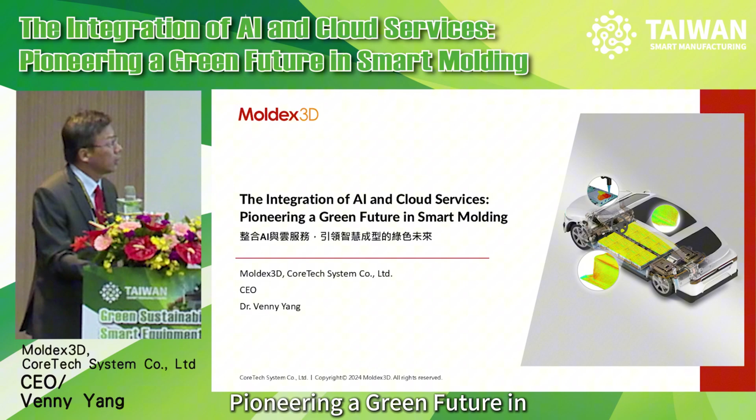My name is Venny Yang from Moldex3D. I'm very happy to have this opportunity to give you a presentation entitled The Integration of AI and Cloud Services, Pioneering a Green Future in Smart Molding.

Plastic has been playing crucial roles in all kinds of products, like everybody knows, such as home appliances that we are using every day, to automotives and high-tech products. However, plastic waste can cause very serious damage to the environment if it is not properly recycled and reused.

The concept of the new plastic economy revolves around creating a circular system where plastic reduction, reuse, recycling, and regulation work together to protect the environment. If we are able to reduce plastic use and reuse materials in the design stage effectively, we will be able to minimize the waste. Recycling then ensures these materials are reintroduced into the economy, reducing reliance on new plastic production. With proper regulation, we can ensure these processes are efficient and sustainable. Ultimately, this cycle not only can protect the environment, but also drives economic development, transforming plastic waste into valuable resources.

Today, I'd like to share how we can reduce waste and utilize recycled material effectively using simulation and some AI technology and cloud services.

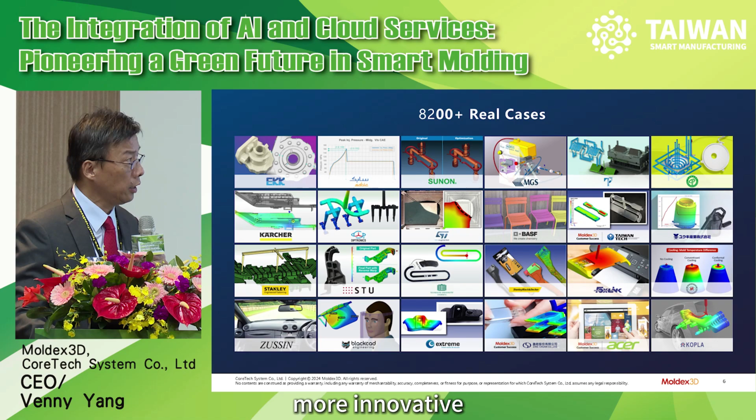A little bit of short introduction to our company, Moldex3D. We are the global leader in plastic simulation solutions, and we have been working with clients on more than 8,000 various projects to validate our simulation technology and also to help them address issues in the design stage, in optimization, and also to be more innovative in this global competitive market.

Let's take a look at the plastic development cycle. Everybody knows this very well, that we always start from part design, and then we go through a mold design stage. We optimize everything. If we can optimize the mold effectively during the design stage, then the mold tooling becomes straightforward. And once the mold is built, then you have to go through the mold tryout stage to make sure the mold can have a stable and efficient production.

Very often we found that we are wasting a lot of materials, a lot of time. We leave a lot of carbon footprint in this stage.

Starting from part design, the common challenges are over-design and over-engineering. We overly design the part, which results in excessive material use, high energy consumption, and increased carbon emissions, and so on. Also, this kind of inefficient geometry often leads to bad properties, bad quality, and then requires subsequent processing, recycling, and causes more waste during this process.

So if we can minimize the waste in the early design stage, we will be able to reduce the waste from the very beginning. We have solutions for design data management and also using some AI to assist in this process. And we have the DOE and also RSM technology to help users be more productive in the design stage. For example, if you have a new design, you can put the design into our database, and then you can find similar models from our database.

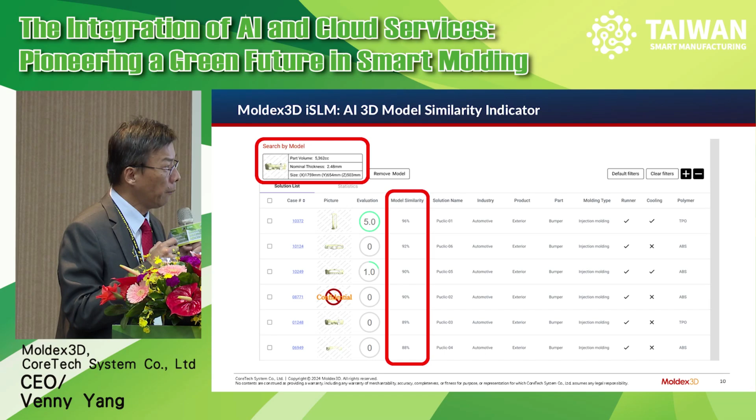So with this database, you will be able to reduce the waste from the early stage of the design process. And also, when you come to the engineering design stage, you have the DOE, you have the RSM, to let you understand the critical factors that might affect your ultimate part quality. With this, you will be able to minimize the warpage, reduce the cycle time, and balance everything very easily. So you can set up different control factors, different quality expectations in the system, and the software will run by itself, learn by itself, and give you the optimized solution.

So if you can somehow minimize the warpage, and then you are sure that this part can be molded effectively, then the next goal is probably to search for the minimum cycle time so that you can further reduce the carbon emission during the production process.

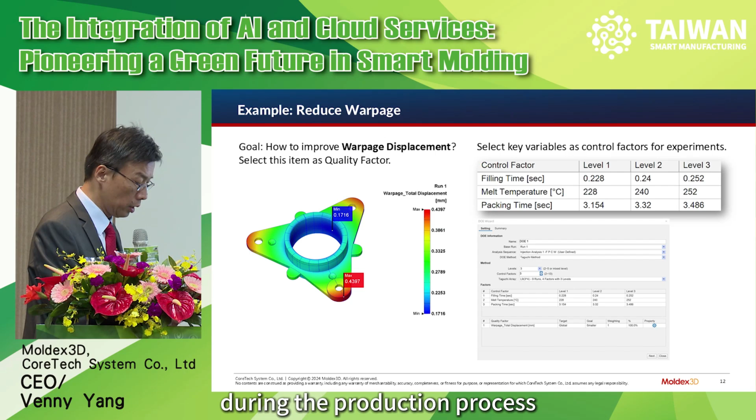So this is another slide showing the possibility to use our system to help you avoid a bad design from the early stage, so as to reduce the waste in the design to production process.

And the next challenge for reducing waste is to use recyclable material. We know recycling is a very hot topic for the plastic industry. Although many have been implementing the concept of design for recycling, and some already succeeded, it's still a very challenging topic for the industry.

Most importantly, it's because the material property is not as stable as the virgin material. So using recycled materials will increase the scrap rates and require more energy-intensive processes, which will lead to greater waste and inefficiency. At CoreTech, in our Moldex3D headquarters, we have the full capability to help you tackle the issue of unstable material properties that result from the recycling process.

We have a material characterization and research center to do all the necessary material characterization for our customers. We can put this data on our cloud service, called Material Hub Cloud. You can subscribe and give it a try, because it features more than 9,000 grades of commercially available thermoplastic materials. So when you have the virgin material, basically you know what to do.

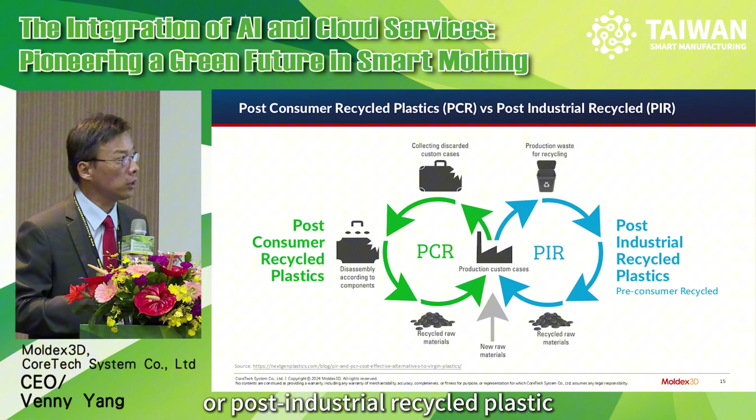Because you have the basic properties of everything, and you have experience working with it, you can start using Moldex3D to optimize your part design and mold design. However, if the material comes from recycling, it can either be post-consumer recycled plastic or post-industrial recycled plastic. Both materials will cause some instability and also some variation in the material properties. So how to find a suitable recycled material that has similar properties to the virgin plastic is a challenge.

So it's very easy now. You can go to our website and look up the materials in our material database, because there are 9,000 grades of materials available on the cloud.

And the next is how to reduce uncertainties when working with the recycled material. The answer is also quite straightforward. If it's a critical part, critical design, we encourage you to do some basic material characterization to really understand the properties of your recycled material. I think many people would think, oh well, that's an additional cost. I don't want to waste my money or spend my money on testing.

But then you end up wasting a lot of money during mold trial because you are dealing with the uncertainty that you don't know anything about it. So how to validate the right design and to ensure part quality, and also reduce the cost of rework and scrap during manufacturing, can easily be done by looking into our material database.

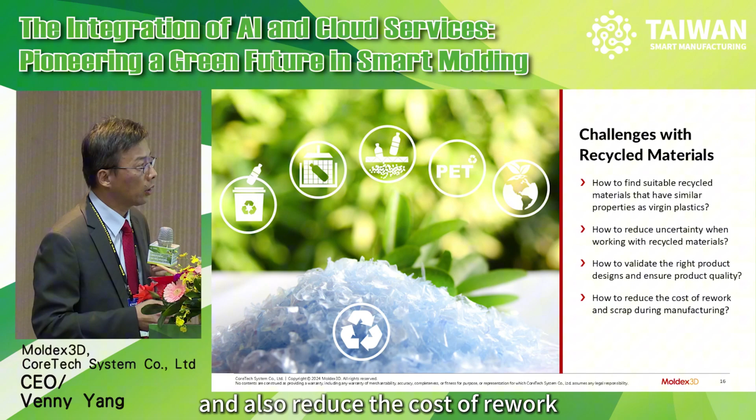So with this in mind, you know pretty much how to adjust your design to tackle these kinds of challenges. However, when we want to do the mold right from the beginning, you need to have a very good understanding of the quantity of the variation, instead of just the trend, just the qualitative only.

Okay, so we have a fully equipped laboratory in our headquarters. We have all kinds of instruments to help you characterize the material processing properties, because I think this is the most important one for recycling material. You can test the rheological property, you can test the PVT property, you can even test the mechanical properties.

And then you can use some kind of mixing rule to understand and estimate, okay, if you use 5% or 10% or 20% of the recycled material, how would that impact your processing condition? How would that affect your part and the mold design? You can do that kind of evaluation upfront to minimize the risk of using it in a very bad way, so that it would reduce a lot of waste in the process.

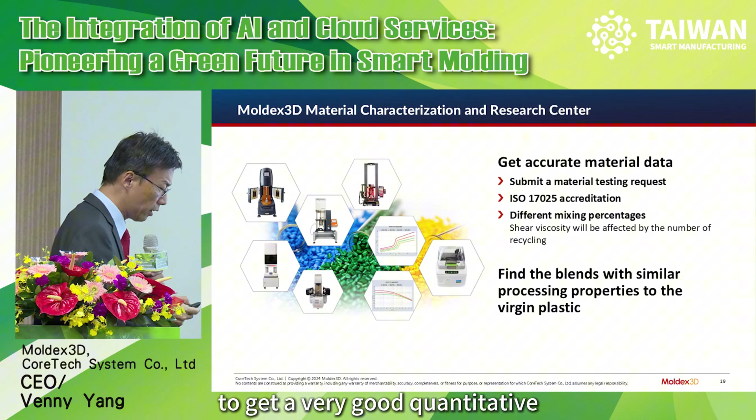So you can get accurate data from our laboratory, and this is an ISO certified laboratory. You can use some kind of mixing rule to get a very good quantitative understanding of the recycled material that you are using in your system.

But of course, for recycled materials, because the source of recycling and also the methodology used in the recycling can be different, it's always recommended to do some basic testing of this recycled material so that you can get a very quantitative understanding of the variation.

Okay, and the next topic is about how to reduce the material amount used in the design. Well, there are a lot of possibilities that you can try. For example, lightweight is a theme of the automotive industry, because every kilo of weight you save in the car's plastic parts can be turned into more efficient fuel efficiency for your vehicle. So you will definitely need to look into the lightweight topic.

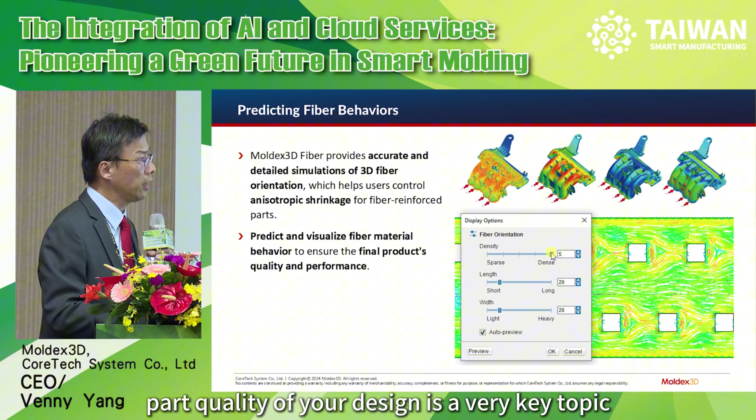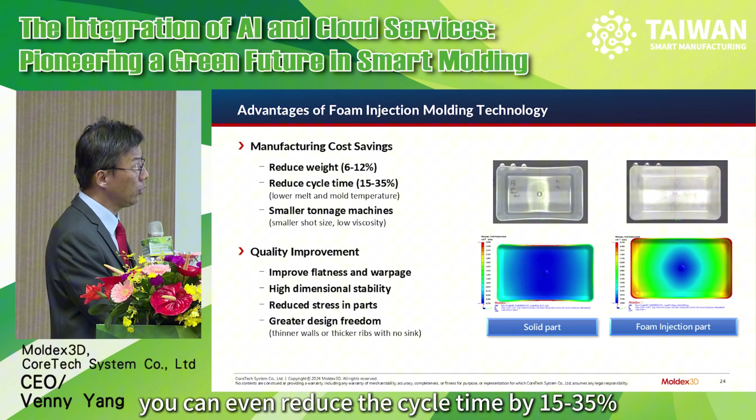And also, foaming is another technology that people usually use to reduce the part weight, and you can use Moldex3D to not only reduce the weight, but help you reduce the cycle time. In many cases, you can even reduce the cycle time by 15 to 35%. And for some special parts, you might want to use gas injection, water injection - this kind of process to hollow out unnecessary material so as to reduce the material used in your part design.

So you can reduce the waste from the very beginning of this entire process. You can also use Moldex3D for that. And of course, if you have a more advanced application, such as composite or compression molding, you can also find corresponding answers from Moldex3D.

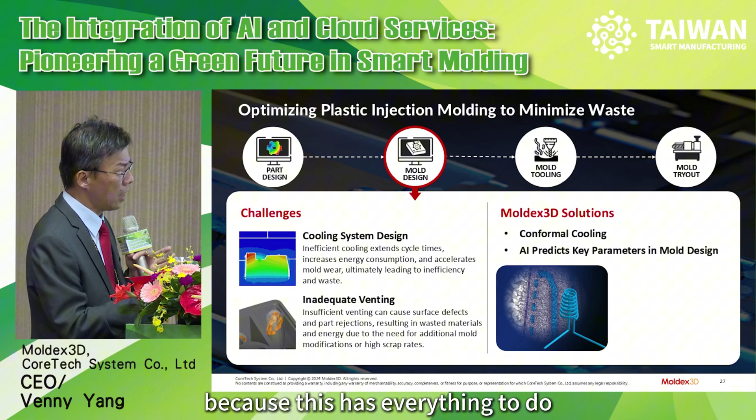Next topic is about how to reduce cost, waste, and carbon emission in the molding process. The most important thing is how to address the cooling, because cooling usually takes up the highest percentage in the entire molding cycle, and also how to address the issue of inadequate venting, because it has everything to do with the quality and appearance of your final product.

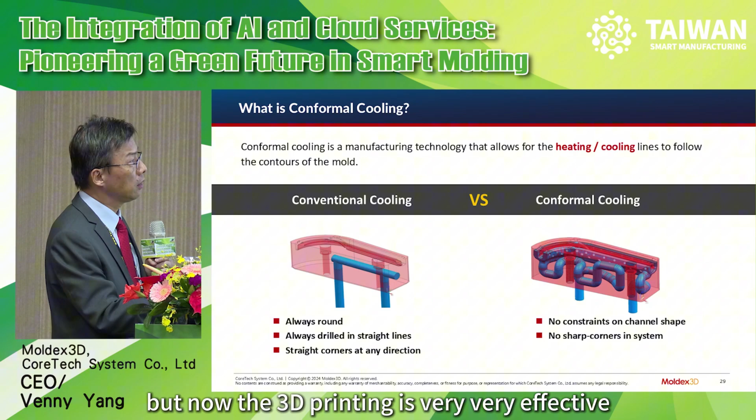This slide explains how important cooling can be in its impact on sink mark, warpage, and the cycle time of your product. Many users use the traditional cooling system on the left, but now 3D printing is very effective and very affordable.

So we encourage every user to look into the possibility of using conformal cooling design, because there's no constraint on the channel shape, and it can really minimize the cycle time while giving you the best quality of your final product.

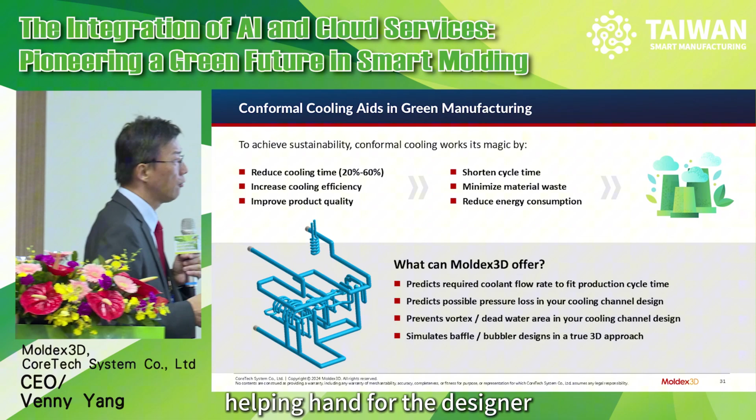So what we can offer with Moldex3D is that it's very easy to design your conformal cooling system, and also to evaluate and optimize the performance of this kind of design. So conformal cooling design is no longer a headache for the designer - it's actually a very big helping hand to address the issue of cycle time and productivity.

Next, you can even use the system I introduced in the beginning to pull out all the necessary and useful information without having to run too much simulation. So for designers starting a project, you can use the system to give you a very good understanding and a very good recommendation.

Once you have a good part design and a good mold design, the mold tooling becomes straightforward. Once the mold is ready, you have to go through the mold trial stage. Often the common problem in the industry is that we usually have excessive mold trials, which takes away a lot of your time, creates a lot of waste materials, increases energy consumption, and inevitably causes higher carbon emission.

And also, it's not easy to have a connection between your process data and your mold trial data. So it's very difficult to accumulate all the experience of your mold tryout in a knowledge interface, a knowledge database, effectively, so that you can reuse and extract knowledge from the system.

So we have the iSLM system, which I introduced from the beginning. This is a smart data management platform. It even helps you to calculate carbon emission.

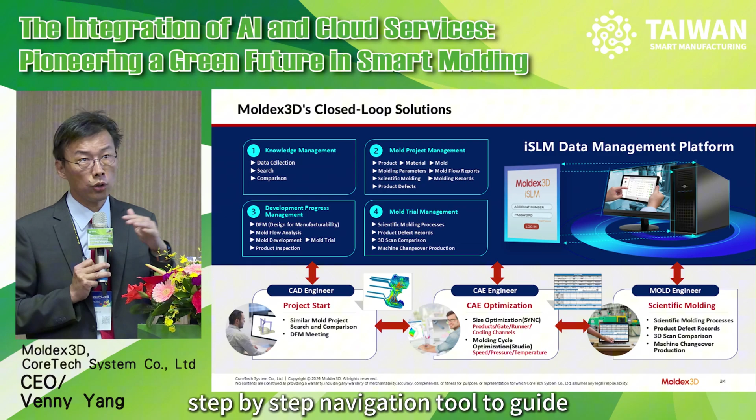With this system, you can start from a project doing a lot of optimization, like I just introduced, and then go through a scientific molding process. This is a software-guided, step-by-step navigation tool to guide you through the molding process to guarantee you the most effective mold trial process and the best results.

With this, we have further integration with software and leading machine suppliers such as Fanuc, Sumitomo, and Engel. We are working on more integration with international machine suppliers.

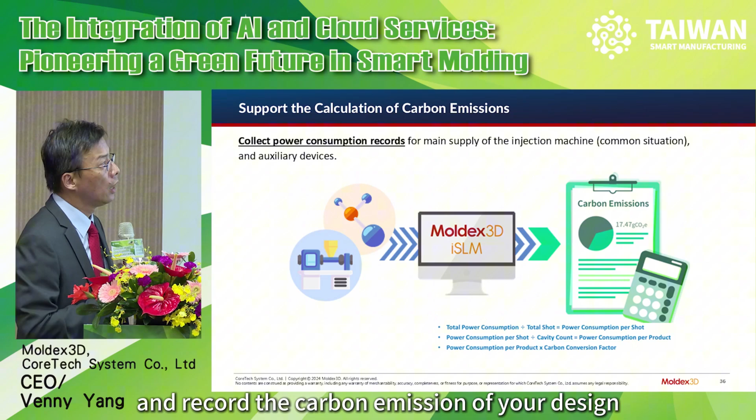With this system available, you can calculate and record the carbon emission of your design. The ultimate goal is that one day we want you to design your part and process with the goal of minimized carbon emission. With this in mind, we can work together to minimize the waste that we are generating from the part design and molding process.

So these slides summarize what I just briefly introduced today. It's a very big honor to be able to share our vision in terms of how to utilize Moldex3D and our AI and cloud services to work together to address the issue of plastic material reuse and recycling. Thank you very much.

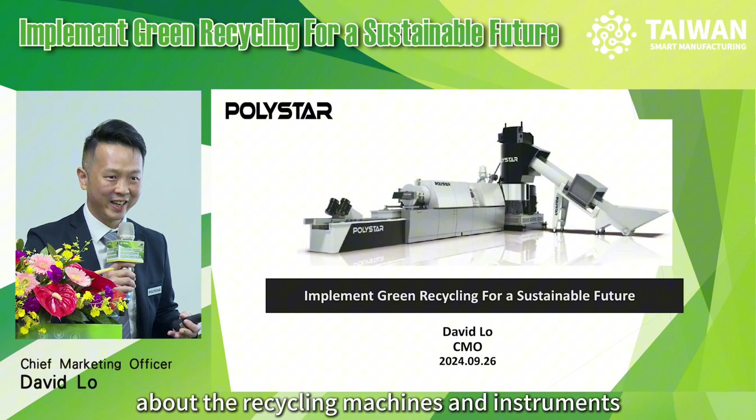Following the previous conversation, Mr. Yang talked about the software, and I would like to emphasize more the hardware about the recycling machines and instruments.

As we know, at this moment the economy's development mode has shifted from the linear economic to circular economy mode, because in the past you can find the material sourced from the logistics to the manufacturing, and then it's disposed as waste. The processing of waste is like burning or storing underground, which produces lots of pollution, including ocean pollution, air and water pollution. After all, it causes a lot of environmental protection issues and damages the green earth in the future.

This is why the European Union has set up regulations for environmental protection. From 2025, all plastic producers need to put at least 30% of recycled particles and pellets into their production lines.

It has been regulated for all producers to do so. That is why we need to try ways to implement circular economies to refine the recycling process, including post-industrial recycling and post-consumer recycling. As you can see, this is a circular economy changed from the last sections. We can say the recycling process will create added value for our sustainability.

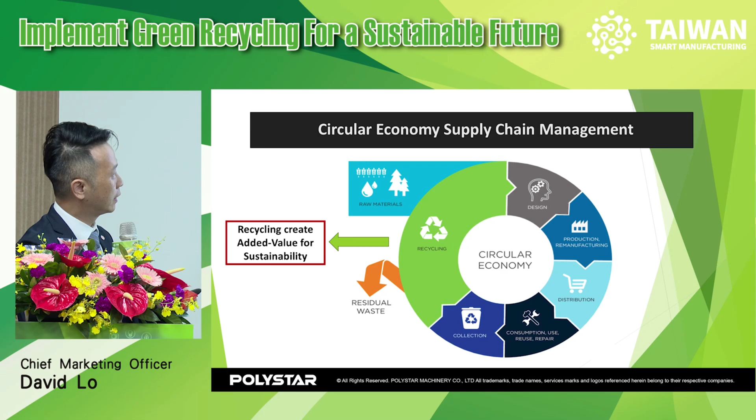How can recycling machines drive green sustainability? It has 3 parts. The first is resource preservation - you can source your materials to reduce waste. The second is reducing plastic waste for environmental protection and reducing environmental impact. The third is you can save lots of energy and cost, including your raw material purchasing cost and production cost.

Here I would like to talk about the benefits of plastic recycling for sustainability. There are 3 parts. For the environment, it can reduce plastic waste in the world and conserve resources. For plastic producers, it can provide cost savings on your production lines, and innovation and market competitiveness.

For economic benefits, you can save lots of raw material purchasing cost and refine the recycling process, and reuse recycled pellets back to your production line to develop diversified solutions for the circular economy and sustainability. And also for social benefits, it is like CSR, where you can fulfill social responsibilities to take care of environmental protection.

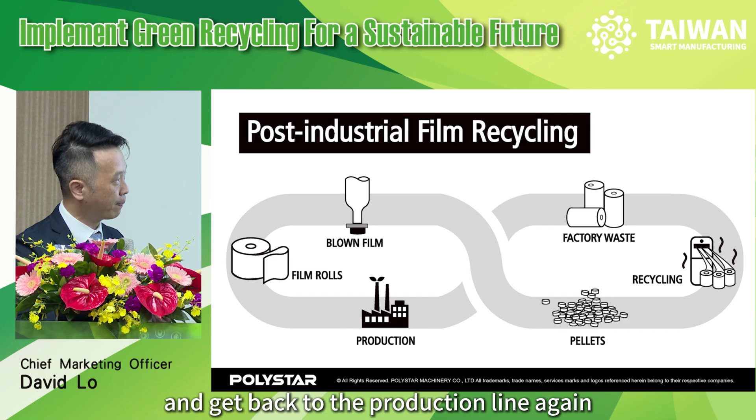As you can see, most plastic producers use blown film extrusion machines. When they produce in-house scrap or post-industrial production waste, they can reuse our machinery to get it back into the production line again. This is the Repro-FLEX model. We have cutter compactors, integrated solutions in the feeding sections.

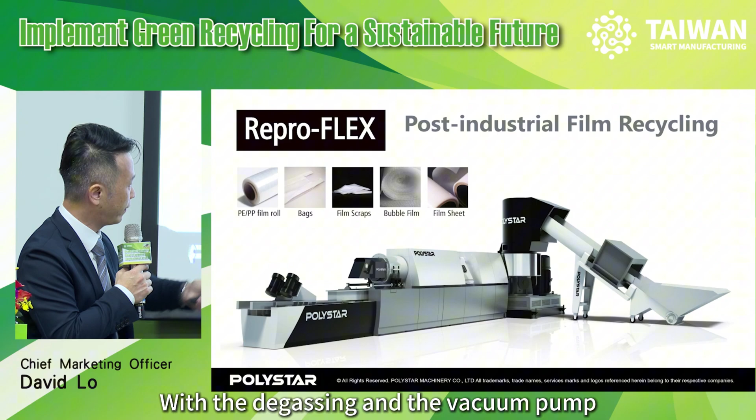This is the cutter compactor integrated section. The material comes from the belt conveyors and goes to the cutter compactors for cutting and densifying, making it easier to go into the extrusion process, with degassing and a vacuum pump to suck out additional gas and moisture, making the recycled pellets more solid and stable.

The final stage is the water ring pelletizing system, which produces good quality recycled pellets. The most applicable materials for the Repro-FLEX solutions include PE and PP film on roll, shopping bags, t-shirt bags, bubble films, air bubble films, and thicker film sheets.

This is the internal structure of the cutter compactor system. As you can see, we have the embedded specific stationary blade and rotary blade inside. This is one of the very critical parts of the recycling solution.

Using this cutter compactor system, as Mr. Yang says, the processing material nowadays is becoming more complicated and diversified, including different shapes, different sizes, and different properties like different MFI, viscosity, and molecular weights. Through this cutter compactor system, we can achieve a homogeneous state, making the material more solid and turning it into a semi-molten status, making it easier and more effective to go into the extrusion process.

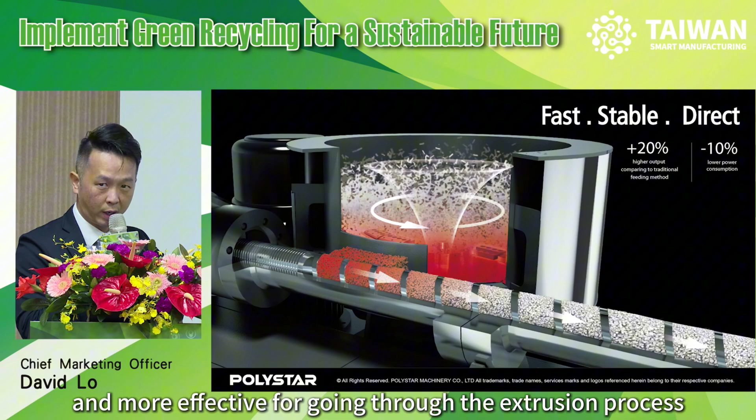This is the whole structure and process of our Repro-FLEX, from direct feeding, cutter compactors, degassing, filtration systems, and water ring pelletizing system.

Here I would like to introduce our advanced intelligent pelletizing system. This water ring pelletizing system, which POLYSTAR adopts, is patented. We embedded smart driving modules in these pelletizing systems, meaning the blade speed can be automatically adjusted according to the pressure variations of the pelletizing die head. As you can imagine, when the material is melted, it generates lots of different melt pressures.

Sometimes the pressure goes high, sometimes it goes down.

Without this kind of intelligent pelletizing system, the shape and quality of recycled pellets will vary and are very difficult to control, because the material may come from landfills and is not so stable. But with this kind of smart driving module, we are capable of ensuring a very stable and good quality of recycled pellets.

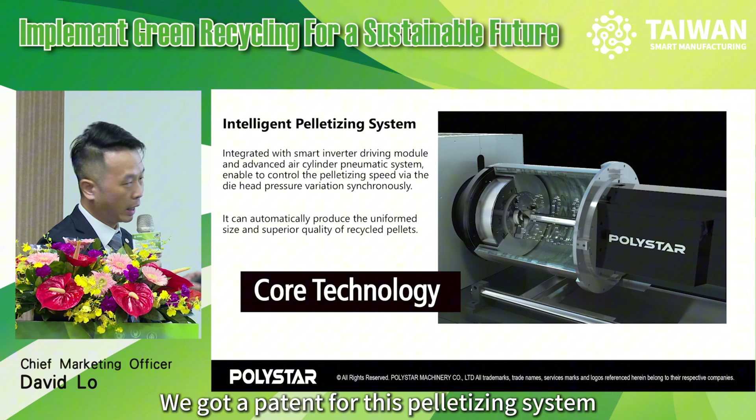We got a patent for this pelletizing system. The second solution I would like to share is the recycling solution for multi-layered film recycling. This solution is especially suitable for food packaging, multi-layered film packaging, and heavily printed film industry.

As you can see, this solution we call the Repro-FLEX Plus. It is capable of processing heavy printing film on rolls, with a large potential for humid pre-wash, flake, and stretch films. This is the structure of the Repro-FLEX Plus, with a triple degassing structure design.

As you can see, this is with one more secondary extruder solution. It is with one more natural degassing zone and one more filtration area. So through this kind of mechanical design, it is capable of removing more moisture and more printing gas out from the material.

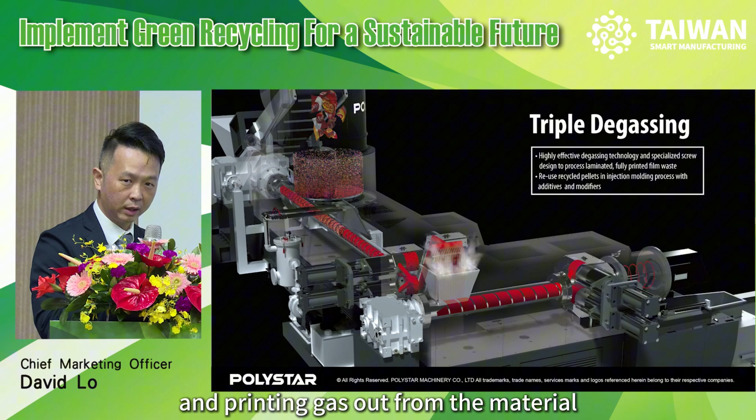This is the whole process of the Repro-Flex Plus recycling solution. As you can see, number 5 is the second degassing cascade system. With this system, it can remove the moisture coming from the wash flake.

And number 7 is water rinse. With the secondary filtration system, it is capable of filtering out additional contamination or dirty materials, dirty waste, in the second filtration system.

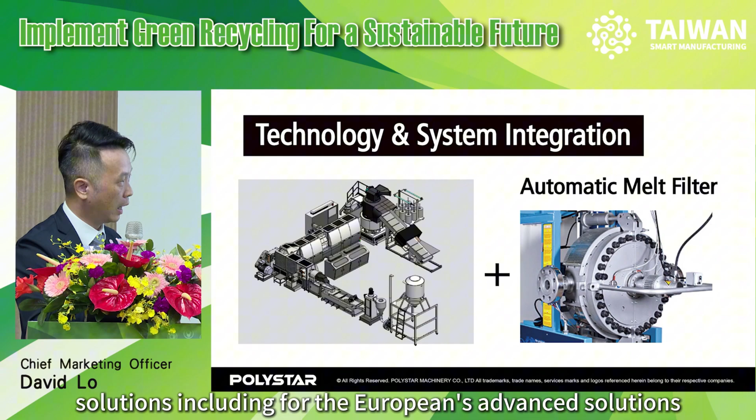For this kind of solution, we also integrate more advanced automatic melt filter solutions, including European advanced solutions. That is one successful case study we are running in Sweden, using machinery extrusion systems integrated with Italian film filtration systems to run ABS and PA.

This kind of rigid regrind comes from triple E electronic waste, and right now it has been running for more than 10 years, with the performance running well.

This is another successful case study we are running in Japan. The customer name is TBM, located in Yokosuka, near the Yokohama area. They cooperate with POLYSTAR, with the biggest 180 model recycling machines. The output can reach 1 ton per hour.

It is also integrated with an advanced filtration system, able to filter out more contaminated waste from the landfills. And these are the photographs - we take the installation and service at the customer's on-site location.

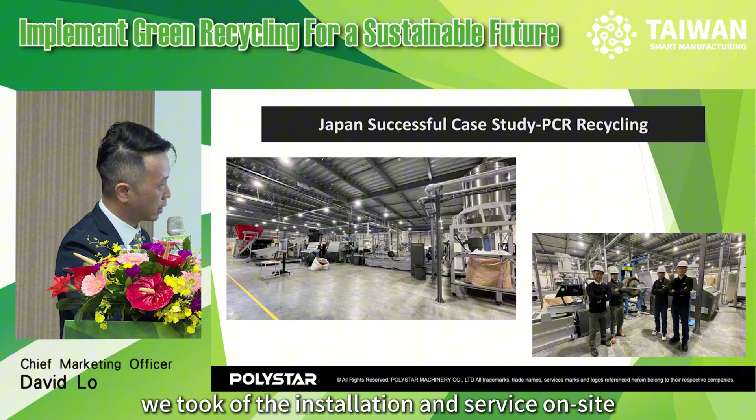The third solution I would like to share is another technology we call the shredder integrated recycling machine. It is suitable for processing PP raffia, PP tapes, fibers, woven sacks, and jumbo bags.

As we know, in India, the Middle East, Saudi Arabia, and Turkish markets, the tapes, looms, raffias, and woven bags industry is very popular and very common. So we developed this specific solution for this kind of recycling application.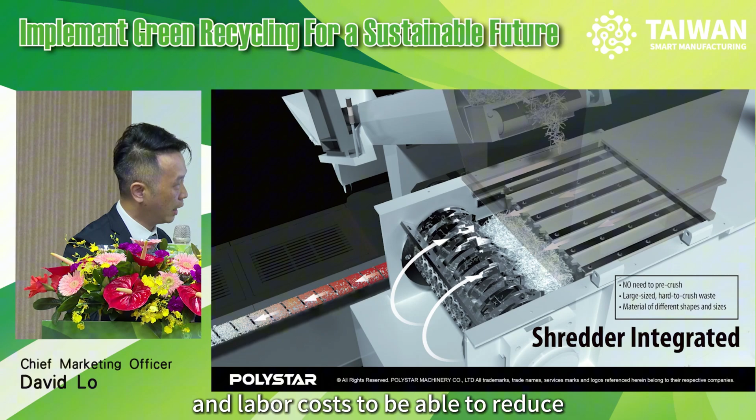So the benefit is the customer can save a lot of installation space. They don't need to purchase isolated shredder units, and the process controls can be in one shape. This saves a lot of production cost and labor cost, reducing the costing in the production line.

This is the process flow for PP raffia woven sack production. As you can see, number 2 is the single shaft shredder, the integrated solution inside. This is the structure of the shredder integration unit. By integrating this specific shredder unit inside, the recycling machine is capable of processing solid structures, different kinds of material such as woven bags and non-woven bags, this kind of solid structure material.

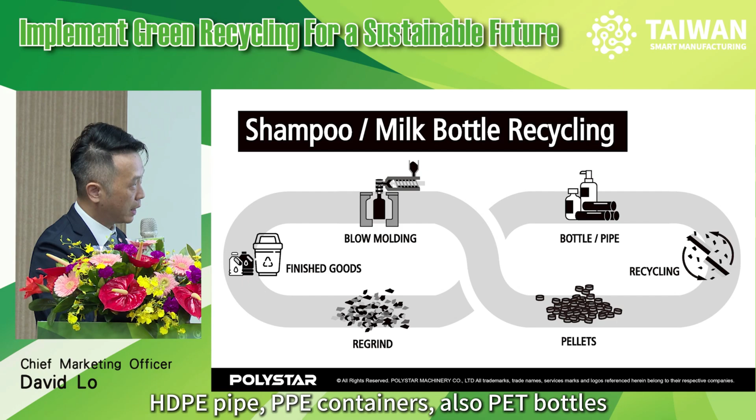And last one, I would like to share about another recycling machine to process injection molding and blow molding products. We have many industries producing households like HDPE pipe, PP containers, and also PET bottles, HDPE bottles, this kind of applications.

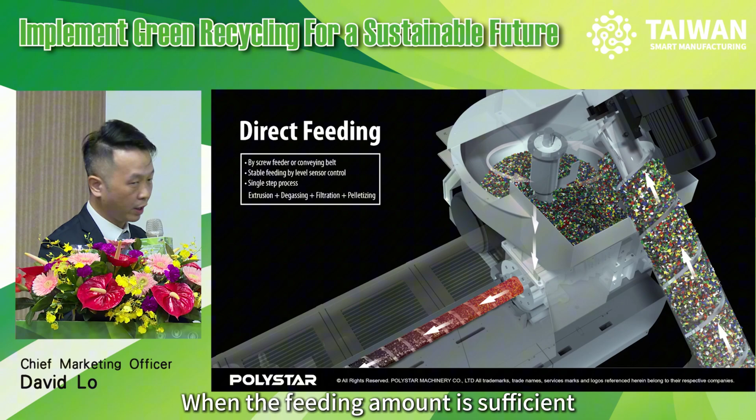So we have this kind of solution to process the crushed rigid regrind by using hopper feeding solutions. This is the scenario of this hopper feeding recycling solution. In this hopper, we have embedded a smart level sensor to detect the feeding amount of the recycling material, and when the feeding amount is sufficient, it will transfer signals to the transferring belt to control the feeding material more efficiently.

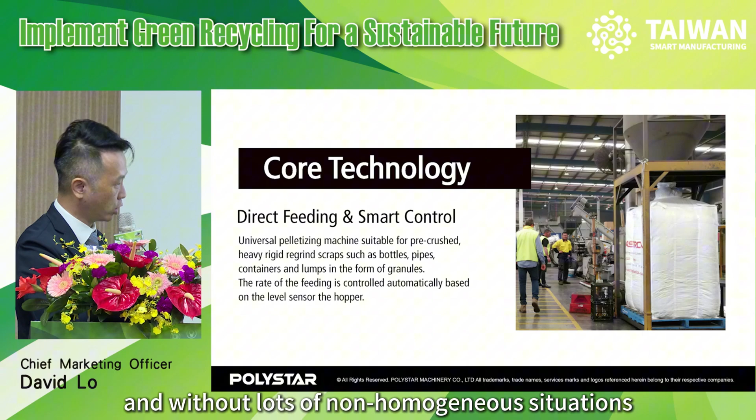This is the process of our direct recycling machine. Using direct feeding and smart control technologies, we can ensure the quality of the recycled pellets is more stable, with more uniform size and without non-homogeneous situations. The last one I would like to share is our intelligent PLC with user-friendly HMI control systems.

For now we're using more and more smart PLC control systems in our recycling solutions. The functionalities of our developed PLC control system include cloud IP-based smart production, and we can proceed with online real-time troubleshooting for customers, with online software upgrades. It can also implement 24-hour automatic machine preheating to achieve smart manufacturing, and this control system is also embedded with energy-saving sleeping mode modules.

When the machine is without operations and startup for more than 10 minutes, it will automatically turn into sleeping mode. We also include error code notifications, big data collection and analysis, and operational parameter recordings.

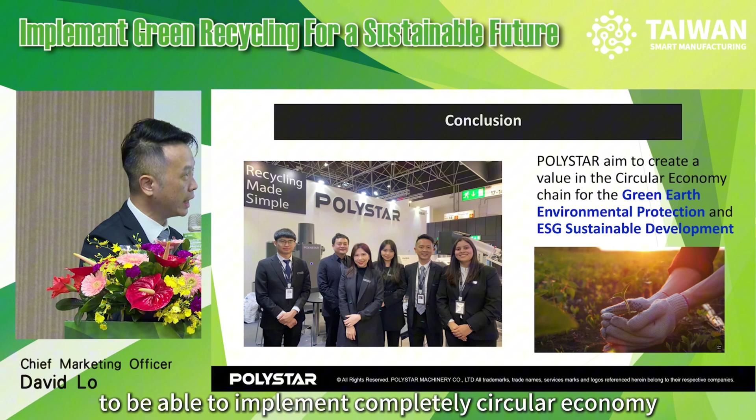That is our POLYSTAR sales and marketing teams, and we aim to create valuable recycling machine solutions to implement a completely circular economy, for the green earth, environmental protection, and ESG sustainable development. Thank you for listening.

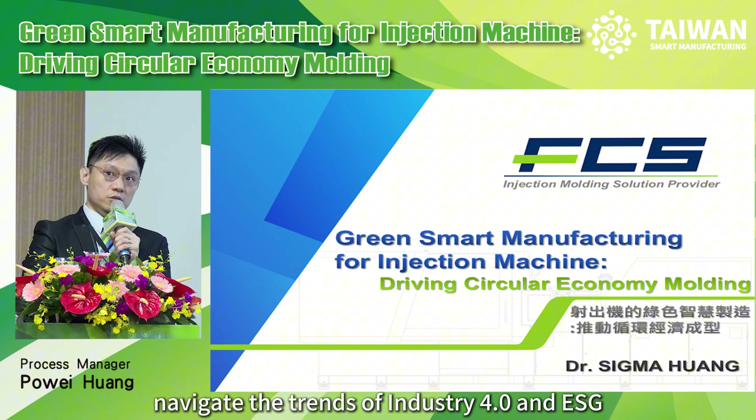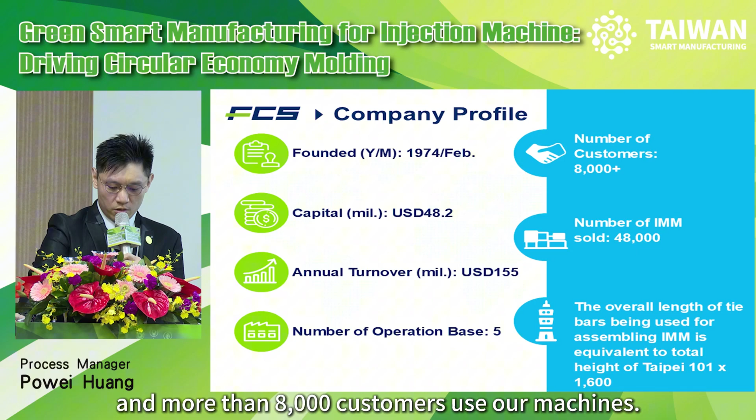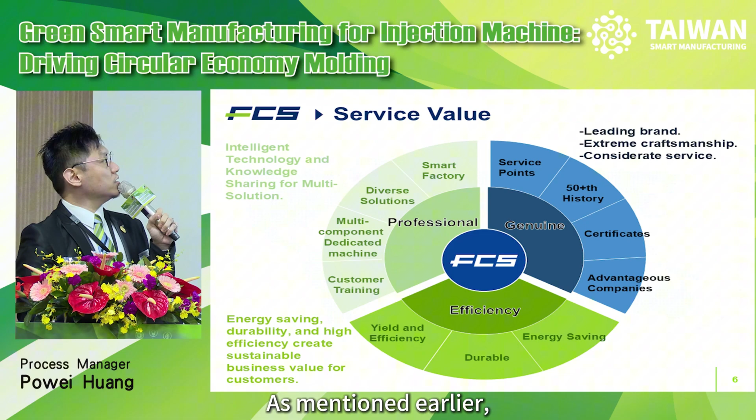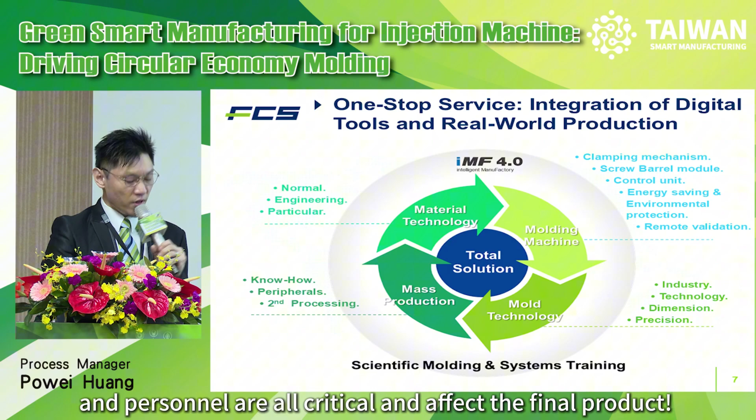FCS takes a systematic approach, a system theory in molding higher quality plastic products.

The general FCS focus on governance is in the requirement manufacturing. FCS does more than just design and manufacture injection machines. We also excel in GMO systems, surveillance solutions, and sensors, allowing us in Industry 4.0. We now provide data-driven insights into our machine's performance. The area is totally within its hardware.

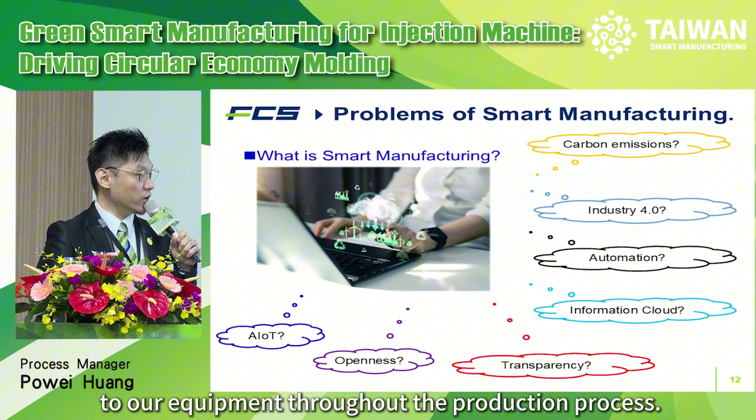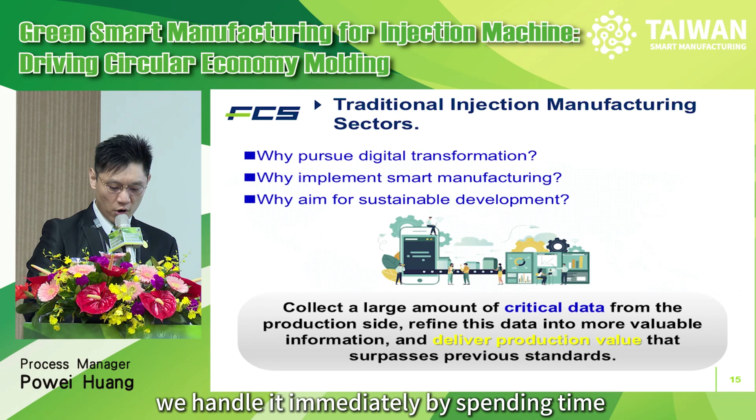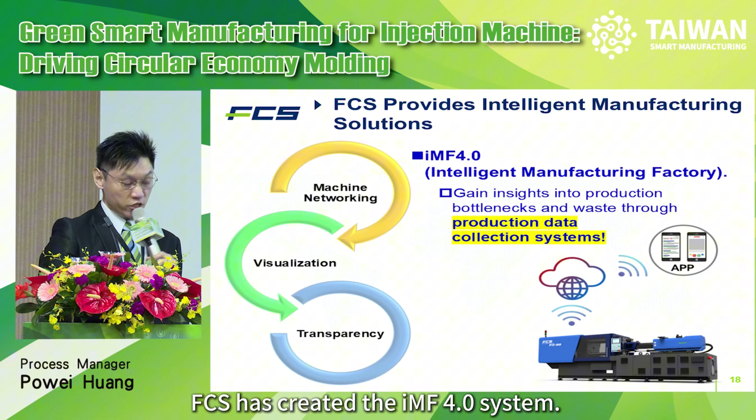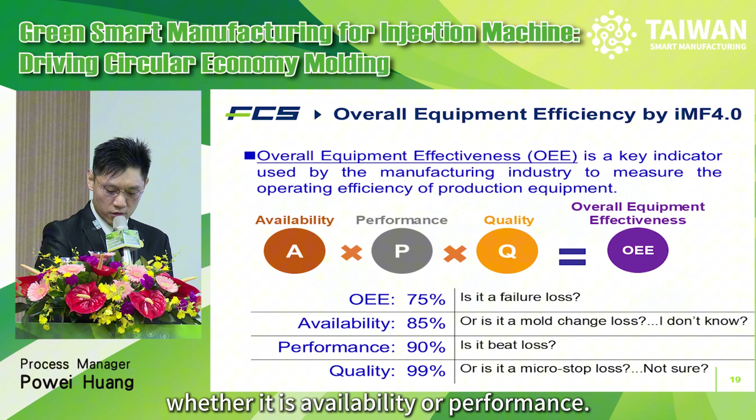So it's a commitment 24/7. iMF will be important and more clients have over 200 machines.

Customers have reduced the downtime. Maybe it's waiting on another, maybe the engineer, maybe the machine. The improvement in self-efficiency and scale in production efficiency.

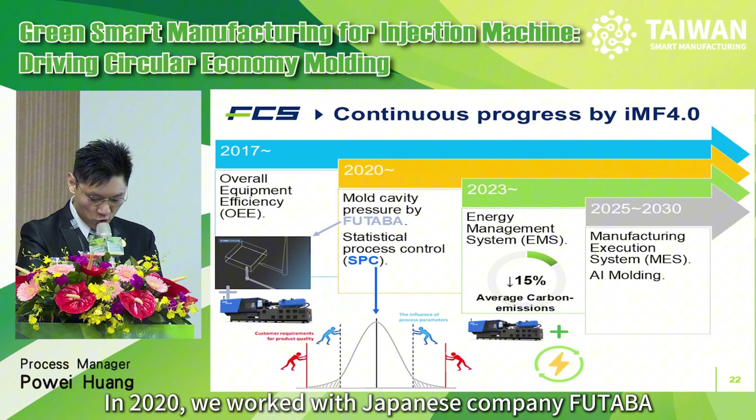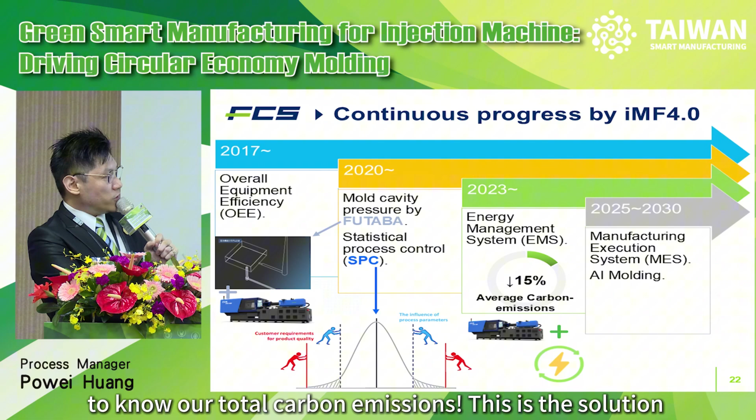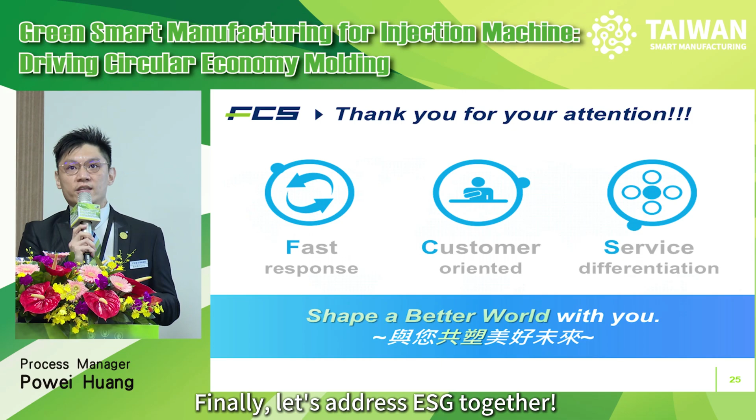Thank you. So why is sustainability important for the plastic industry? Could you share some of your insights with us regarding this question?

I'm Wei from HUARONG Group, and in today's rapidly changing world, sustainability and green manufacturing are challenges for us to handle together, and we just need to do something to protect our Earth because we need to live harmoniously with nature. So, as a professional and specialized injection molding machine manufacturer, HUARONG certainly values development in this field.

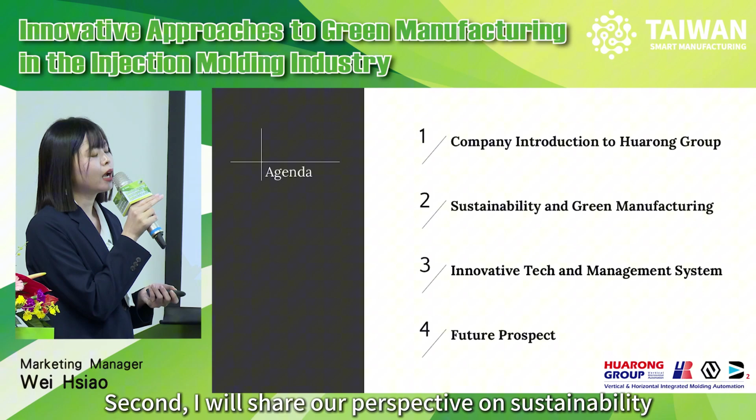Over the next 20 minutes, I will share what we have done to protect, to do the climate action. My speech will develop into 4 parts. The first is I will do a brief introduction to HUARONG and what we have done. Second, I will share our perspective on sustainability and green manufacturing. Third, I will share more about what we have done in this field. And the last part, I will share some future prospect, what we plan to do next, and to share our customer to meet this concept.

About HUARONG, we are a specialized injection molding machine manufacturer with over 40 years experience in producing injection molding machines, offering our customers comprehensive molding solutions with complete machine configurations in both horizontal and vertical machines. We have 3 brands, HUARONG, Nanrong, and Yuhdak, and our headquarters is in Tainan, Taiwan.

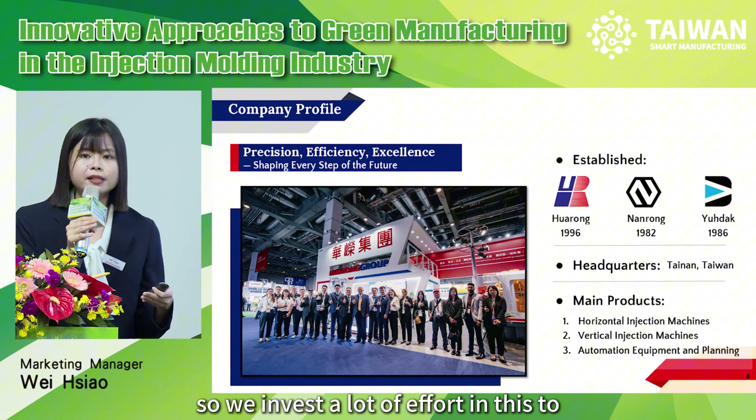Our goal, we are dedicated to providing our customers with reliable, excellent, and efficient equipment and services. So we invest a lot of effort into this to provide more and more service to our customer.

About the machine, because we want to offer customers solutions to meet their injection molding needs, our machines, no matter whether the customer's material is thermoplastic or thermosetting, can all be done in vertical or horizontal injection machines. The machines have complete configurations, so customers can select depending on their production requirements, such as in horizontal machines, customers can select toggle or two-platen machines, and in vertical machines, customers can select sliding table or rotating table with tie bar or non-tie bar design.

Besides the machine part, HUARONG has an independent automation department and IT department for customers, for automation planning and factory management systems, to provide a comprehensive injection molding solution. Just like our company's value proposition: industry alliance creates value, innovation delivers high quality. We always offer complete molding solutions for our customers, and we will, through collaboration with excellent and technological partners, offer more and more services for our customer.

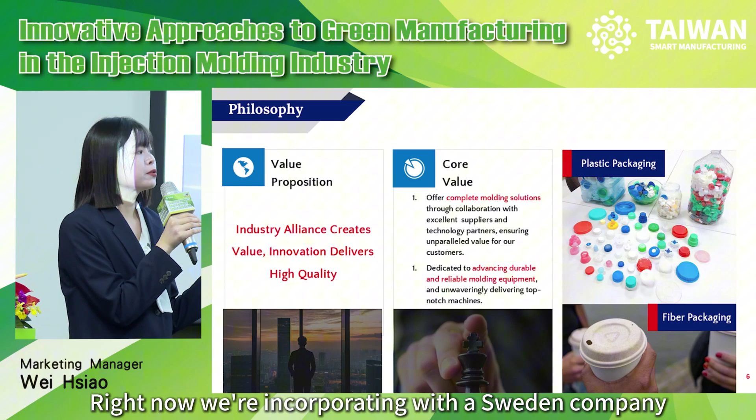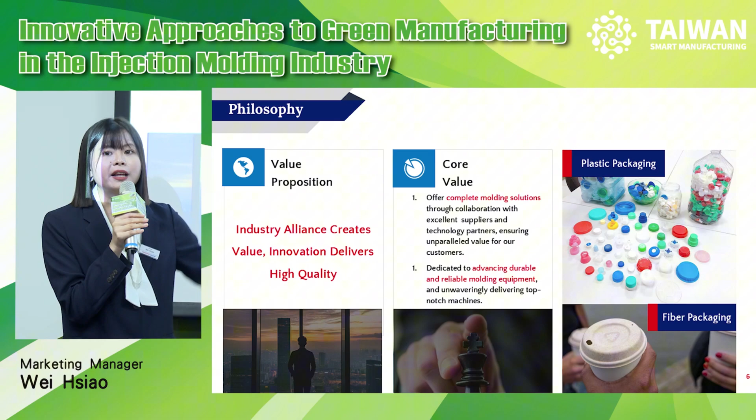For example, on the right side, we do plastic packaging, and it is normal in injection molding machines, right? And right now we are incorporating with a Sweden company, and we are expanding into fiber molding. So we invented a new machine called a dried molded fiber machine to help customers mold products in fiber. I will share more about this in the following section.

Besides this, because we are a specialized injection molding machine manufacturer, we will definitely continue to innovate injection molding technology to offer more and more service for our customers, and we are dedicated to durable and reliable machines for our customers. And now, talk about today's main topic: sustainability and green manufacturing.

Nowadays, we all know that we face a lot of problems, like the growing impact on the climate and rising sea levels. So the need to cut carbon emissions and reduce resource consumption are important and have never been clearer. So what do we have to do? Companies play a key role. We have responsibility in driving economic growth, but at the same time, we need to take climate action to protect the earth and make our life better. So we need to rethink what we can do to live harmoniously with nature.

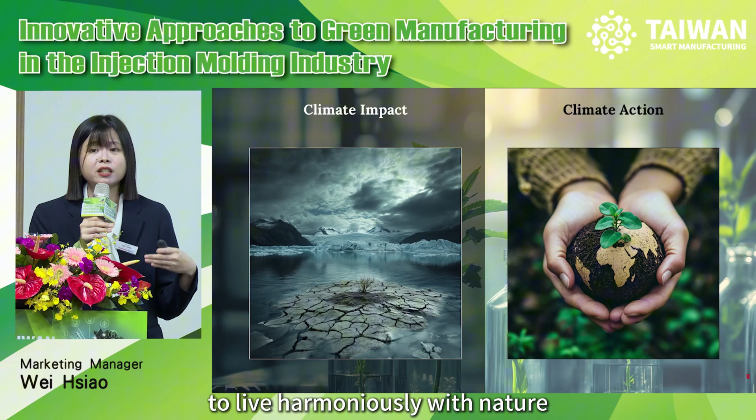This concept is closely connected with ESG, and ESG includes environmental protection, social responsibility, and corporate governance. For this general introduction shown on the screen, I will not spend too much time explaining, but I will simply share what HUARONG has done to help you understand ESG's meaning.

For example, in environmental protection, we think energy usage management and waste management are important. So we keep optimizing our machines to reduce their energy consumption and also lower the product's waste. I will share more on this part in the next section.

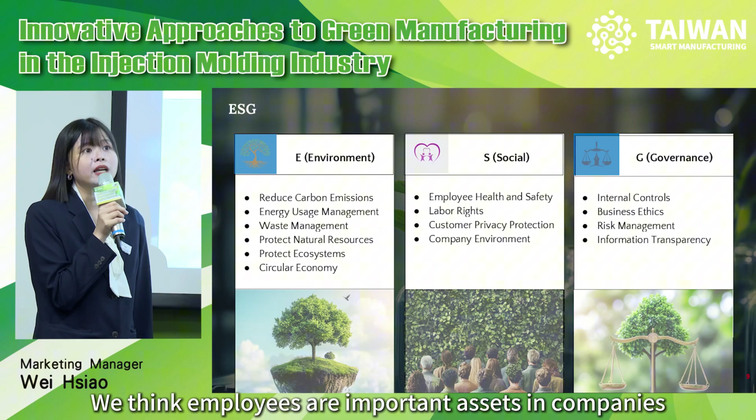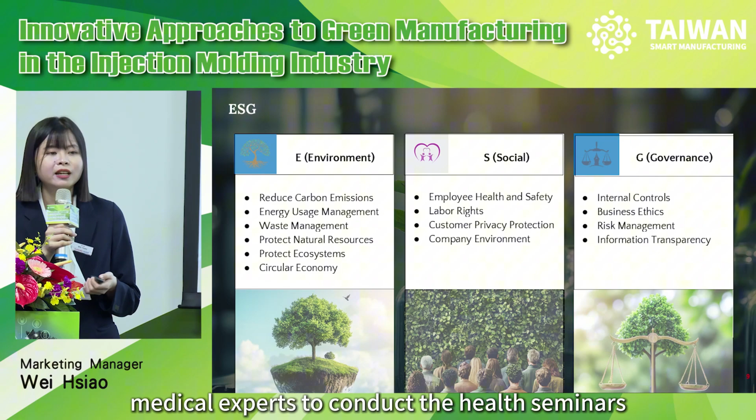Then in the S, social responsibility, we think employees are important assets in the company. So our welfare committee continuously holds a lot of activities, such as annual health checkups, inviting medical experts to conduct health seminars, and employee trips to maintain work-life balance.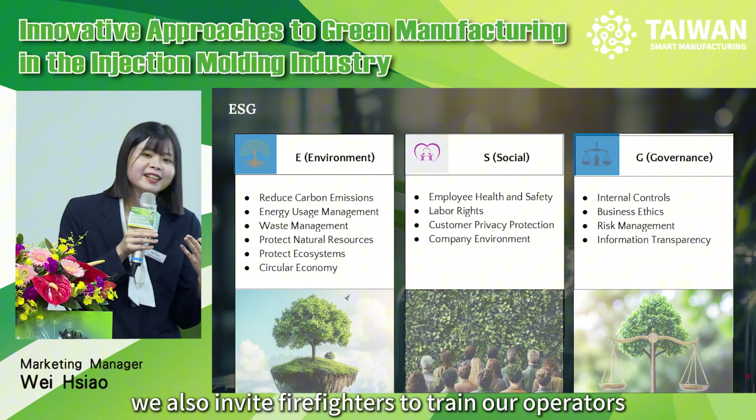And in corporate governance, risk management is important. So we try to reduce the difficult challenges our employees face in the company. We optimize our machines to make them easy to install and maintain, and we also invite firefighters to train our operators so they know what to do immediately to handle emergencies.

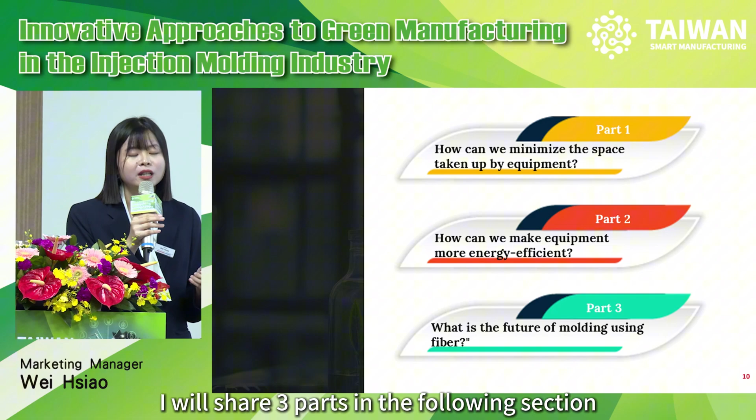So, aligned with the ESG spirit, I will share 3 parts of what HUARONG has done, which will make it easier for everyone to understand. The first part is how we can minimize the space taken by the equipment. The second is how we can make equipment more energy efficient. And the third is the future of molding using fiber instead of plastic.

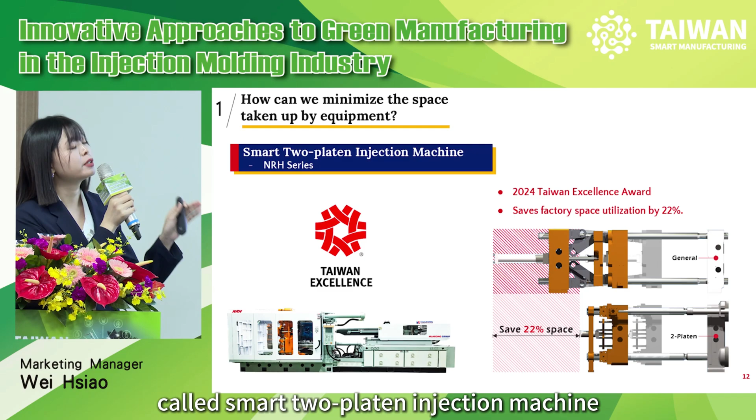So for the first one, HUARONG has developed and launched a new machine called the Smart Two-Platen Injection Machine, which won the 2024 Taiwan Excellence Award. The two-platen machine design takes up 22% less space compared to a traditional three-platen machine. HUARONG continuously innovates to reduce machine length further, so customers can save factory footprint, and because the length becomes smaller, the machine's material usage also becomes lower.

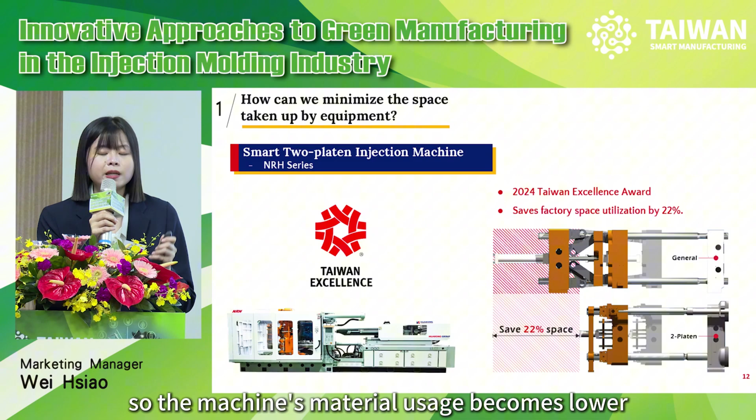Besides, we have several patents on our machines. There are 3, and I'll simply explain each one. The first is called the suspension bearing module, in which the tie bar and the moving platen are not in contact. So the tie bar wear is reduced and the condition becomes more stable.

The second one is the inner sliding module. This sliding feature has high loading capacity and a two-way guiding function, making it more efficient and safer for personnel to install and maintain.

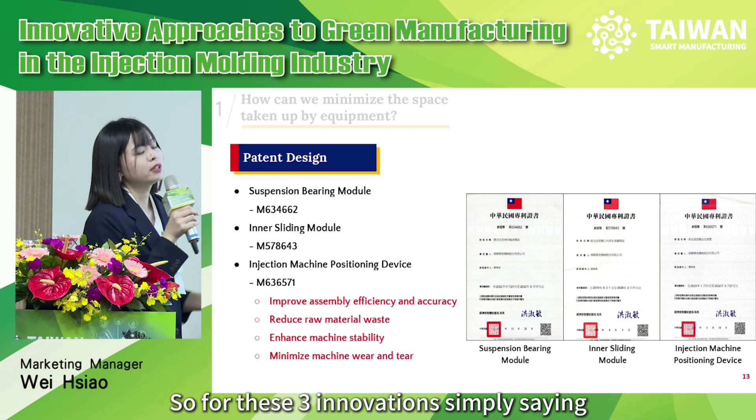The third one is the injection machine positioning device, in which we use a jig and gauge to assist the two-platen machine during installation, so precision becomes higher and material waste becomes lower. So for these 3 innovations, simply put, we improve machine assembly efficiency and accuracy, reduce raw material waste, enhance machine stability, and minimize machine wear and tear.

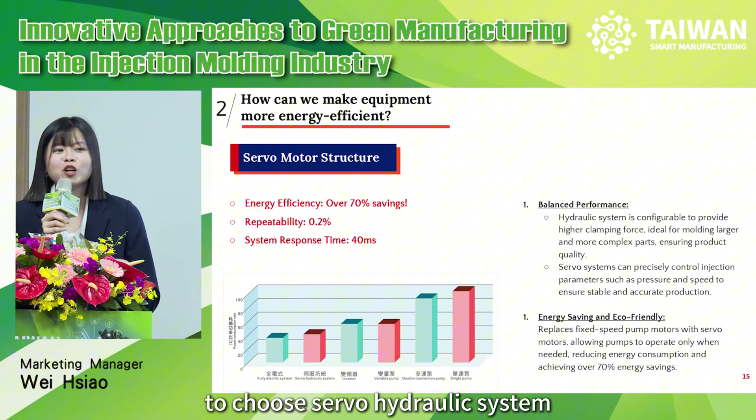And the second part: how can we make equipment more energy efficient? Right now, we highly recommend customers choose a servo hydraulic system for their energy solution, because servo hydraulic has the advantage of combining the hydraulic system and the servo system.

That machine can have larger clamping force for larger and more complex injection molding products. At the same time, it has the servo advantage of high repeatability and low response time to control injection parameters, so the injection condition will be more precise. But the most important thing is that using a servo motor replaces the fixed speed pump motor, so the pump can operate only when needed.

So the energy can save over 70%.

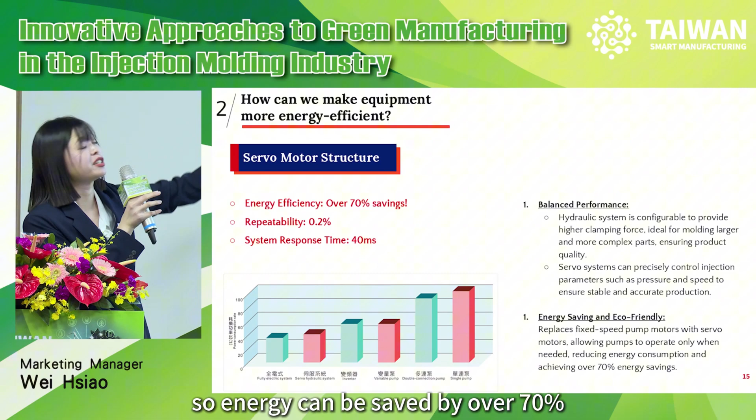This also has another feature because we feature a servo motor in the material storage process, so the storage can be independent. Simultaneously, when the storage is doing this process, the product cooling and mold opening can happen at the same time. So it can also shorten the molding cycle to improve the production efficiency.

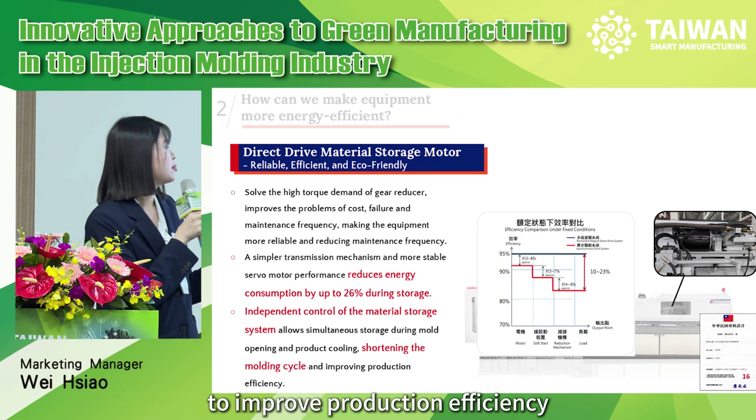And the third and last part, what is the future of molding using fiber? This technology is operated with a Swedish company called PulPac. What we do, simply said, is a dry molding fiber machine. When you search on the internet you can see the detail, but I'll just say the advantage: it uses 100% pure pulp with a 99% material usage rate, meaning almost the pulp can be used directly without any waste.

The second difference compared to traditional fiber molding is that this new innovation is 10 times more efficient than traditional fiber molding machines, with no wastewater production, resulting in lower environmental impact.

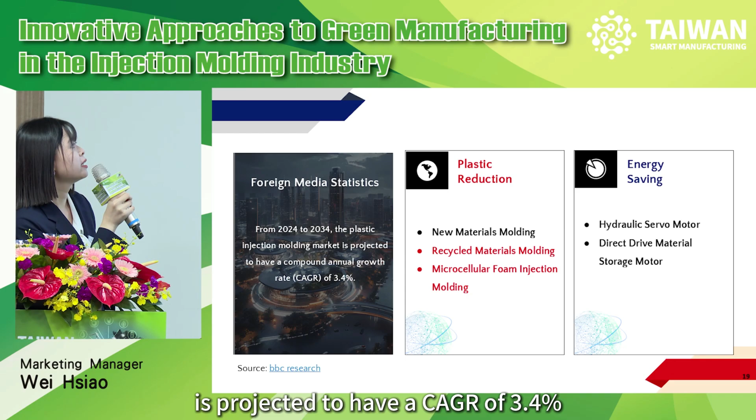I'll quickly say, I just searched the internet and according to foreign media statistics, from 2024 to 2034 the plastic injection molding market is projected to have a compound annual growth rate of 3.4%. So as the injection molding market is growing, what do we need to do? HUARONG is focused on two areas: plastic reduction and energy saving.

I've emphasized energy saving a lot in our previous speech, so now I want to simply talk about plastic reduction, which is also what we plan to do next. It's about recycling material molding and microcellular foam injection molding.

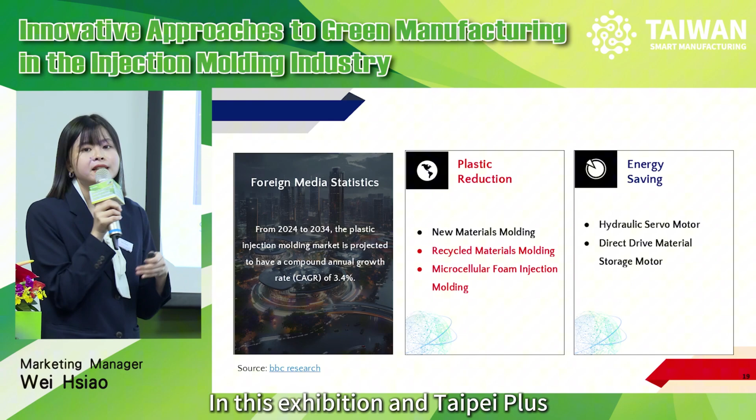At this exhibition at Taipei Plas, the recycled material molding has not launched yet, but if everyone has interest, please focus on our website, we will launch it later.

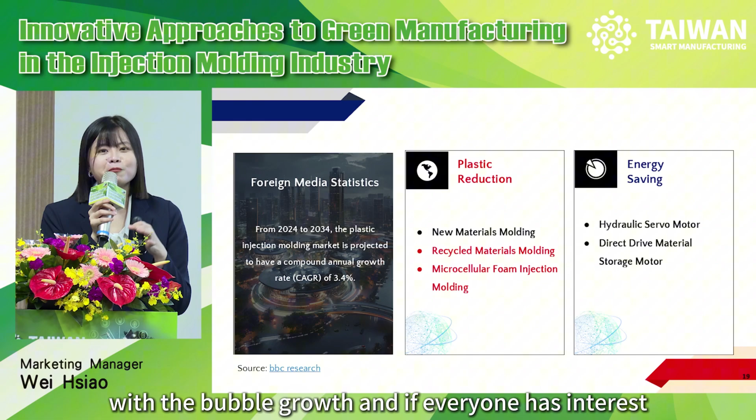I want to mention more about the last one, microcellular foam injection molding machine, which can reduce the product weight and save material cost. At the same time, it reduces the traditional holding pressure stage with bubble growth. If everyone has interest, we can talk later. With this advantage, the cycle time can also be shorter when the product becomes lighter.

And lastly, I want to share again our chairman's motto: industry alliance creates value, and innovation delivers high quality. HUARONG will always be your best molding partner, offering comprehensive solutions for you. So thank you for your concern.

So in the future perspective, you mentioned that the company is optimizing plastic reduction, one of which is microcellular injection molding. Can you describe more about it with us?

Actually, during the injection molding process, we apply nitrogen pressure into the molten plastic process, so less plastic is used during production. Actually it has 5 advantages, but because I forgot to show my detailed information on the slide, I'll just simply say the 5 key points. If anyone has interest, maybe we can talk later.

So about the 5 key benefits of microcellular foam injection molding: the first is it can achieve 15% to 20% product weight reduction, which means you can save more on material cost.